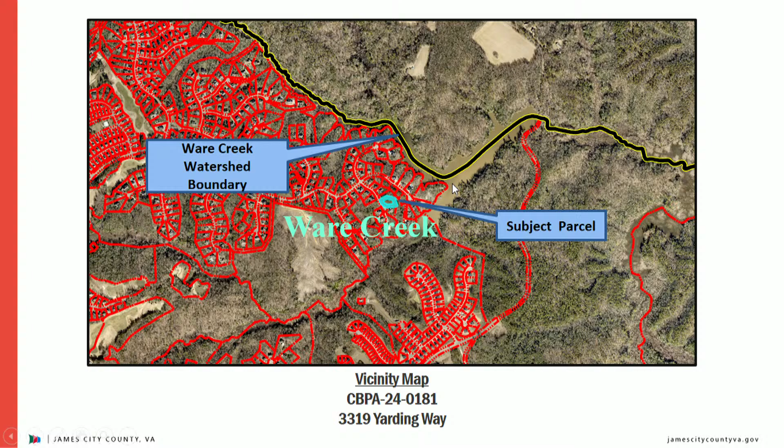You can see the subject parcel outlined here in blue, along with that Ware Creek watershed boundary in yellow with a black line covering it, just indicating the outline of the limits of James City County. The lot size of this property is 0.59 acres, of which 48% is located within the RPA.

The applicants are proposing to construct 2 retaining walls. Total impacts to the RPA associated with this proposal equate to 1,905 square feet of administrative impacts and 228 square feet of legislative impacts, for a total of 2,133 square feet of impacts to the RPA buffer. Total required mitigation for this amount of impervious impacts equals 5 planting units, or 5 canopy trees, 10 understory trees, and 15 shrubs. The applicants have submitted a mitigation plan equaling 5 planting units with an additional understory and shrub, therefore exceeding the county's mitigation requirements.

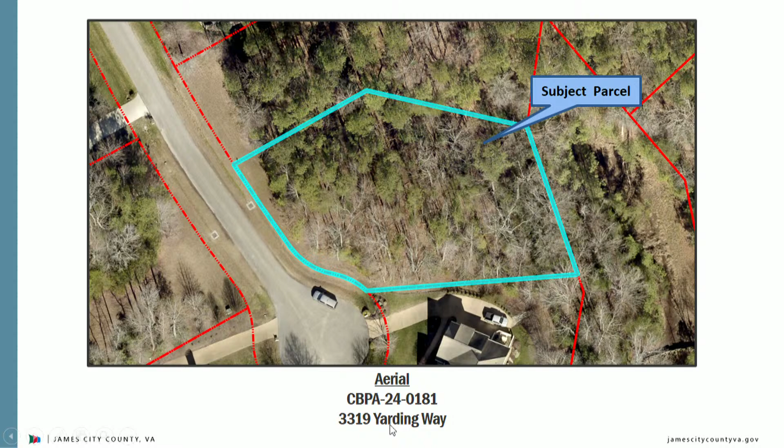Looking at some recent aerial photography, we have the subject parcel outlined in blue here, and I'd like to preface this by saying the orientation of the GIS is different from that of the site plan, so we're going to be rotating it a little bit counterclockwise here. Here's the existing topography, and then the current RPA buffer on the property, and then, orienting ourselves, this is the proposed site plan.

The building setback is outlined in this dark blue here. You can see the limits of the wetlands here in green, along with the proposed mitigation plantings. And then you have the landward 50 RPA buffer here, along with the seaward 50. The portions of the retaining wall that are in the landward 50 are in purple here, with the portions that impact the seaward 50 buffer in orange.

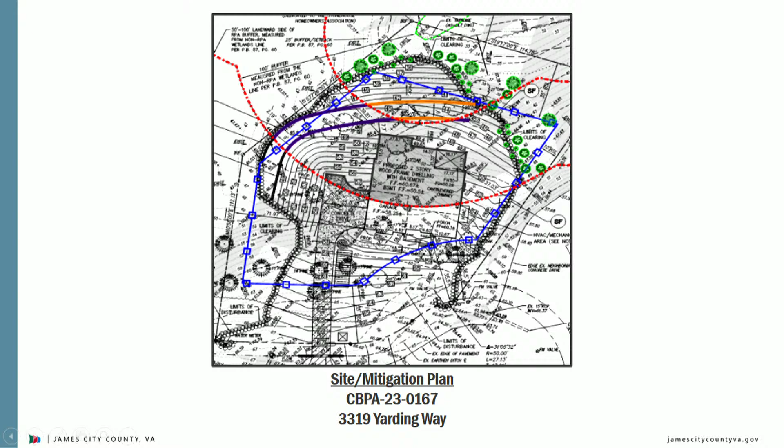Moving in a bit closer to give you a better look, this little buffer here is just showing the proposed limits of disturbance. And then the proposed single-family home here, it's grayed out. That is under administrative approval by staff.

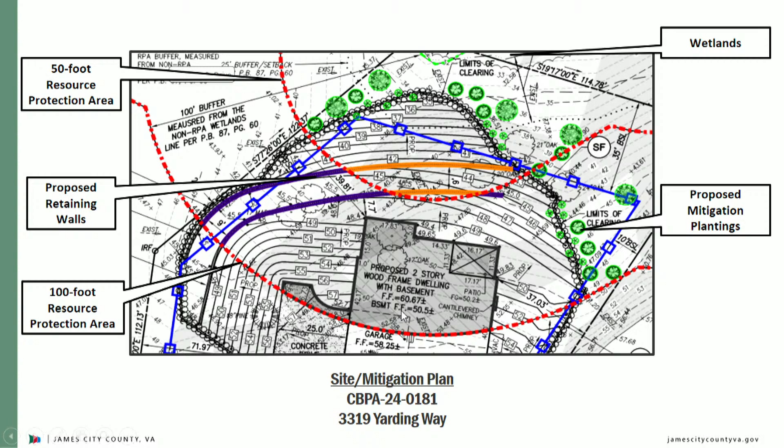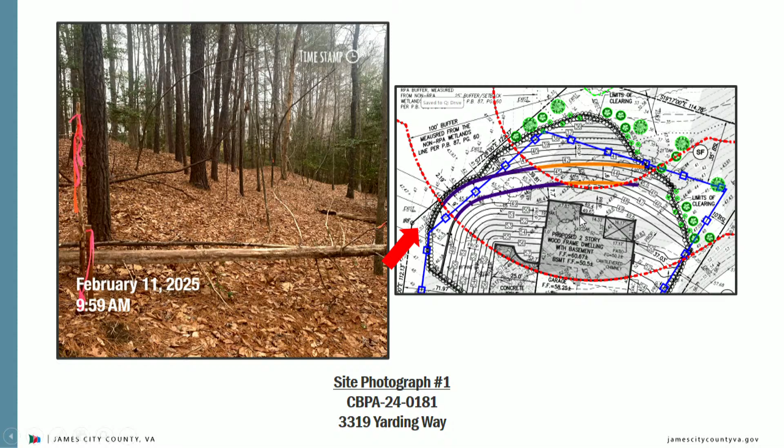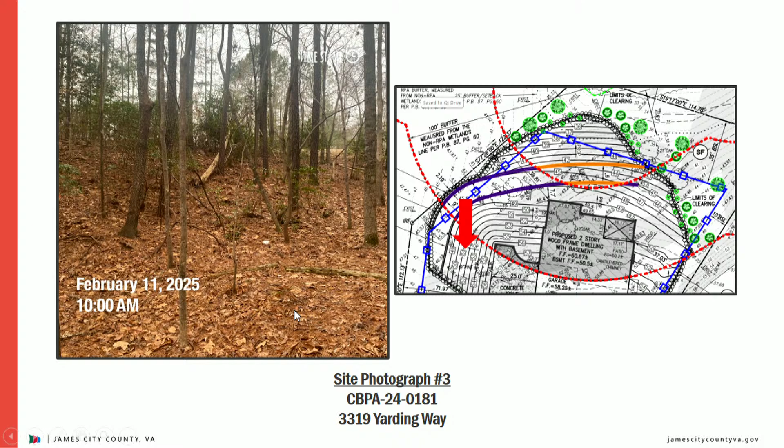Some current site photos, going off this corner of the property line, where those retaining walls start here. We're going to go right, so it's going to extend from about here, all the way out to here. And then just to look back up towards the front of the lot to give you an idea of the topography, since there are a couple steep slopes.

Staff has evaluated the application and exception request for the construction of 2 retaining walls. This application meets the ordinance conditions in sections 23-11 and 23-14 and should be heard by the board because the construction of 2 retaining walls is considered accessory in nature.

The board may grant exceptions to section 23-7 if the application meets the following 5 conditions outlined in front of you. Staff has reviewed the application and exception request and has determined the impacts associated with the proposal to be minor for the proposed development.

Staff recommends approval for this exception request, and if the board wishes to approve this request, staff recommends the following conditions be incorporated into the approval.

The applicants must obtain all other necessary federal, state, and local permits as required for the project. The applicants must submit a surety of $3,750, in a form acceptable to the James City County Attorney's Office, to guarantee the mitigation plan equaling 5 canopy trees, 11 understory trees, and 16 shrubs.

The applicants must record an affidavit in the Williamsburg-James City County Courthouse prior to the issuance of the building permit. A 6-foot chain link fence must be installed along the limits of disturbance that run along the wetland system prior to the start of construction.

This exception request approval will become null and void if construction is not begun by February 12th, 2026, and written requests for an extension to an exception must be submitted to the SRP division no later than January 1st, 2026, which is 6 weeks prior to the expiration date. If you have any questions, I'd be happy to take them at this time.

Questions for Emily? Would you be kind enough to show the site plan one more time, just to orient us? And back one more, to orient us to the building setbacks and so forth.

It looks like they've moved that right corner of the house as far forward as they can.

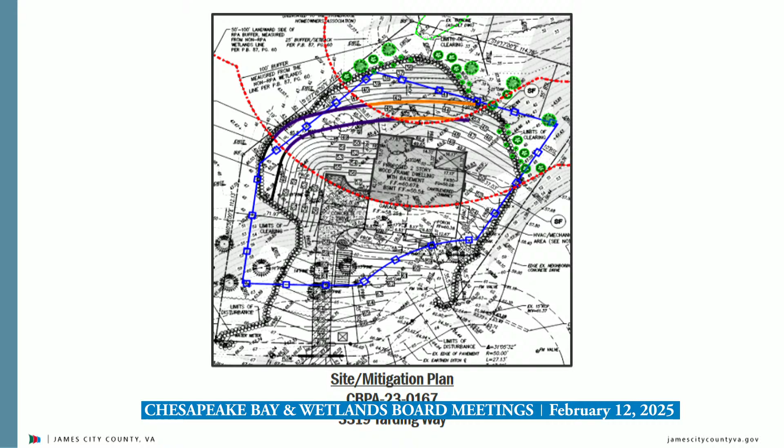Is there any erosion on the property now? I didn't see any, but based on the existing topography, you can faintly make it out on the site plan here with it up on the screen. That little grayed out bit here and there just shows steep slopes. Kind of going back to some of the site photos, you can see how steep it gets, and moving down and then looking back up, it's very hilly, so to speak. But I did not note any erosion when I was out there.

Thank you very much. Any other questions? With that, I will open the public hearing. Would anybody care to address the board on this matter? No takers.

Looks like the matter is before us for discussion. I'll leave the public hearing open in the event somebody wishes to speak.

Thoughts or comments? There's no existing erosion, so I assume the retaining walls are there to serve some other purpose, like maybe making better utilization of the property.

Constructed properly, it should create... You know, I do know that this is hilly terrain, and we've seen these projects in other areas of the county where after construction, they end up with sheet erosion because of the increased impervious surface. I kind of view these as preventative in nature, as opposed to addressing an existing erosion problem.

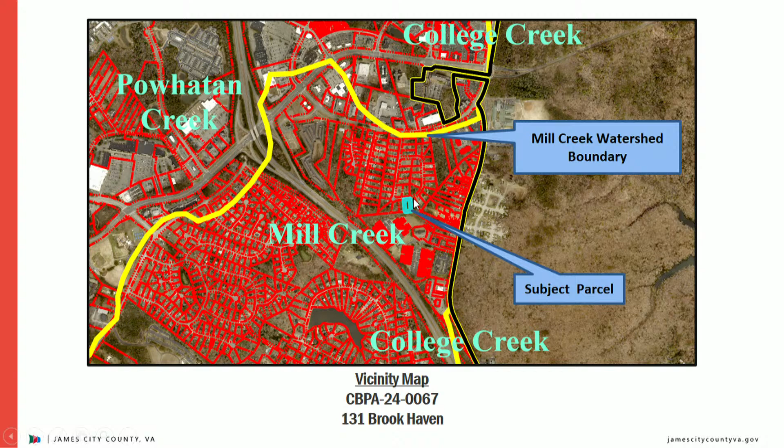You can see the subject parcel outlined in blue here, and then again we have the Mill Creek watershed boundary outlined in yellow here. The parcel was platted in 1972 prior to the adoption of the Chesapeake Bay Preservation Ordinance in 1990. Therefore, the impacts to the landward 50-foot RPA buffer are considered administratively and outside the jurisdiction of the Chesapeake Bay Board. The total lot size of this property is 0.46 acres, of which 98% is located within the RPA. The applicant is proposing to construct a single-family dwelling with an attached deck.

Total impacts to the RPA associated with this proposal equate to 1,409 square feet of administrative impacts to the landward 50-foot RPA and 1,753 square feet of legislative impacts to the seaward 50-foot RPA, for a total of 3,162 square feet of impacts to the RPA overall.

Total required mitigation for this amount of impervious impacts equals 8 planting units, or 8 canopy trees, 16 understory trees, and 24 shrubs. The applicant has submitted a mitigation plan equaling 8 canopy trees, 16 understory trees, and 33 shrubs. This exceeds the county's mitigation requirements.

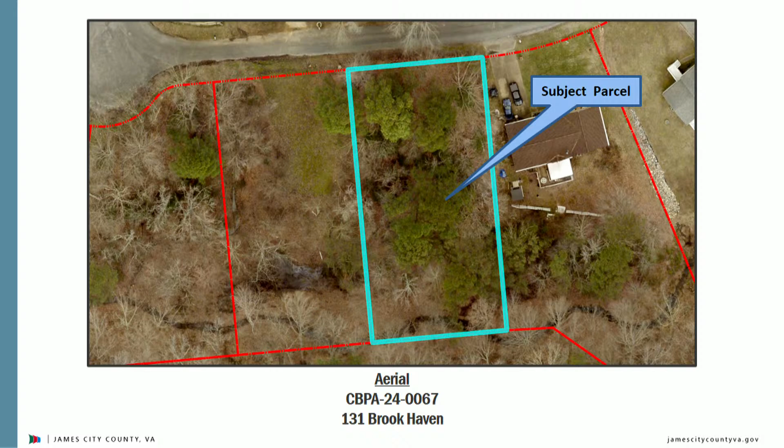So here we have aerial photography, and again, orientation with GIS versus the site plan is a little different, so we're going to have to turn this 180. This is the front of the lot here, along with the existing topography per GIS and the resource protection area. As you can see, the majority of the lot, with the exception of this little bit here, is within the RPA.

And then here we have the proposed site plan. The grayed out portion here is the administrative impacts to the landward 50, with the legislatively approved impacts to the seaward 50 in orange. We have the limits of the wetlands here. As you can see, the limits of disturbance run alongside here, so a condition of approval will be a 6-foot chain link fence. We have the buffers here along with the front building setback.

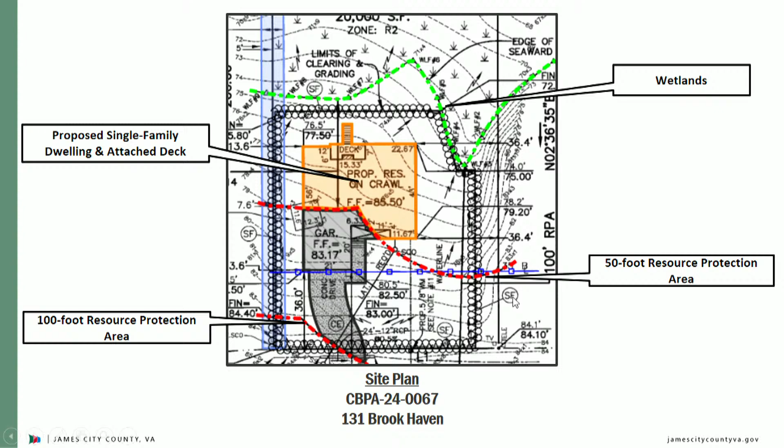And then same thing as before, but with the proposed mitigation. As you can see, all the replantings are to occur within that RPA buffer.

Some recent site photos. If you look here on the site plan, there's an existing structure. That would be this to your left here. So a good way to gauge where we're at in terms of that seaward 50-foot RPA buffer beginning. So right about here is where that proposed single-family home and deck will be going in.

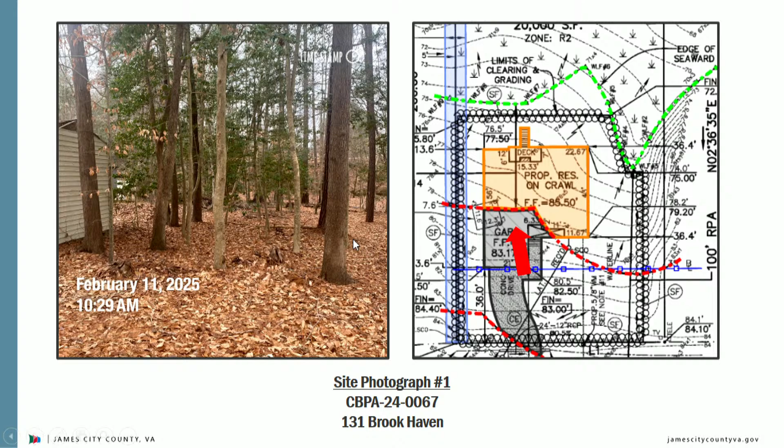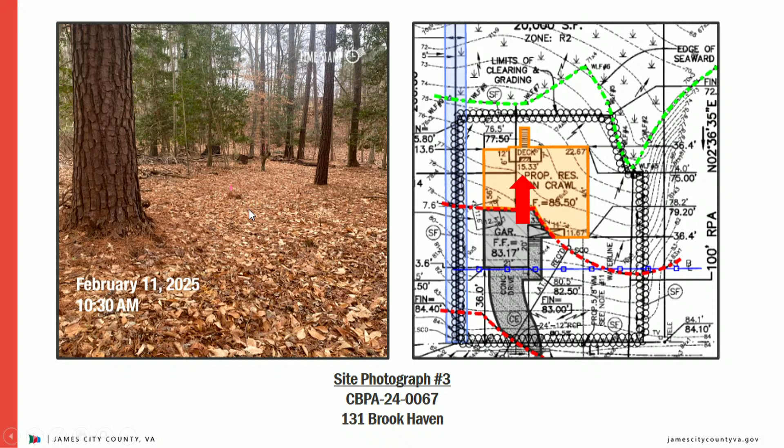Moving forward a bit to see it better in this area here, and the limits of disturbance. Then just going a little bit closer to show the extent of where that deck and single-family home will be placed. And then just looking back up towards the front of the lot to show you the topography of the site currently. Slopes to the rear a bit, but nothing too significant.

Staff has evaluated the application and exception request for the construction of a single-family dwelling with an attached deck. This application meets the ordinance conditions in sections 23-11 and 23-14 and should be heard by the board because the construction of a single-family dwelling with an attached deck within the seaward 50-foot RPA cannot be approved administratively. The board may grant exceptions to section 23-7 if the application meets the following 5 conditions outlined before you.

Staff has reviewed the application and exception request and has determined the impacts associated with the proposal to be minimal for the total proposed development. Staff recommends approval for this exception request, and if the board wishes to approve the request, staff recommends the following conditions be incorporated into the approval.

The applicant must obtain all other necessary federal, state, and local permits as required for the project. The applicant must submit a surety of $5,250 in a form acceptable to the James City County Attorney's Office to guarantee the mitigation plan equaling 8 canopy trees, 16 understory trees, and 33 shrubs.

The applicant must record an affidavit in the Williamsburg-James City County Courthouse prior to the issuance of the building permit. A 6-foot chain link fence must be installed along the limits of disturbance that run along the wetland system prior to the start of construction.

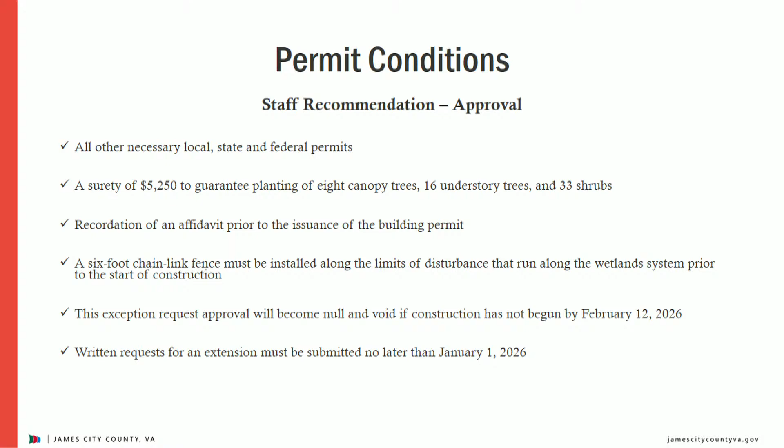This exception request approval will become null and void if construction has not begun by February 12, 2026, and written requests for an extension to an exception must be submitted to the SRP division no later than January 1st, 2026, which is 6 weeks prior to the expiration date. If you have any questions, I'd be happy to take them at this time.

Any questions for Emily? So one question. For, I know we're familiar with like Ford's Colony, we do a lot of these, and the minimum square footage necessary, or the minimum square footage requirement for like a house in that neighborhood - does Brook Haven have a minimum square foot requirement in the neighborhood that you're aware of? Not that I'm aware of, so I will defer that to the applicant.

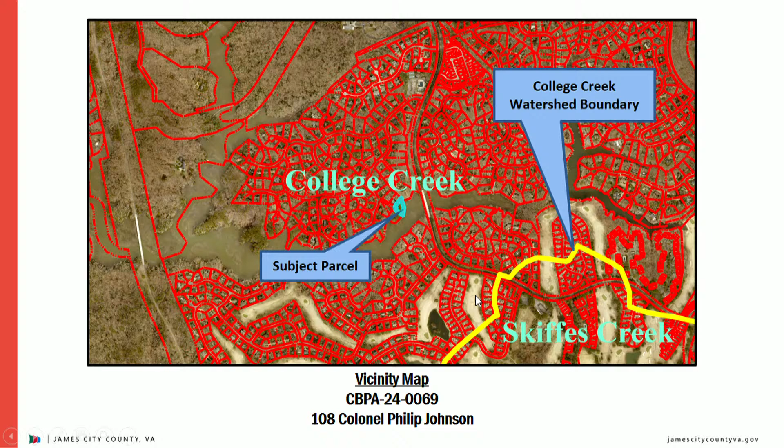You can see here, as usual, subject parcels in blue with the watershed boundary outlined in yellow. The total lot size of this property is 0.55 acres, of which 95% is located within the RPA. The applicants are proposing to construct a single-family dwelling.

Total impacts to the RPA associated with this proposal equate to 3,307 square feet of administrative impacts to the landward 50-foot RPA, 728 square feet of legislative impacts to the seaward 50-foot RPA, for a total of 4,035 square feet of impacts to the RPA. The parcel was platted in 1978 prior to the adoption of the Ches Bay Preservation Ordinance in 1990. Therefore, the impacts to the landward 50-foot RPA buffer are considered administrative and outside the jurisdiction of the Chesapeake Bay Board.

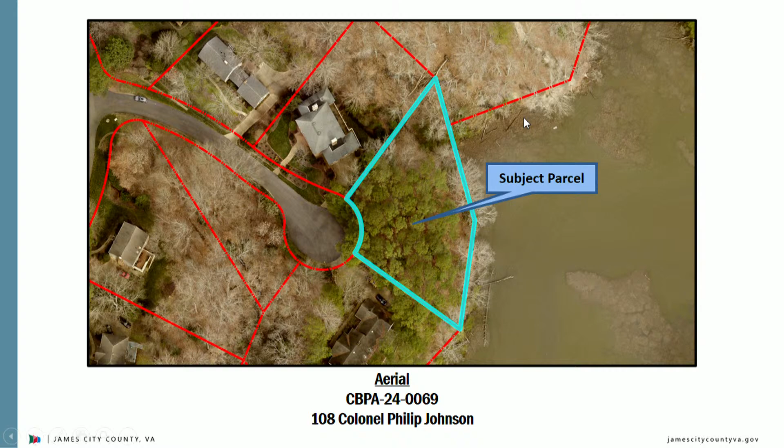We have aerial photography in front of you of the lot, this is the front of the lot, rear of the lot, along with the existing topography and RPA buffer, as well as the FEMA floodplain, closer to the water. This is the proposed site plan with the legislative seaward 50 impacts highlighted in orange. As you can see, based on the existing topography, still fairly far from the wetlands due to the slope. We have the limits of disturbance outlined in this black buffer, along with the building setbacks in blue.

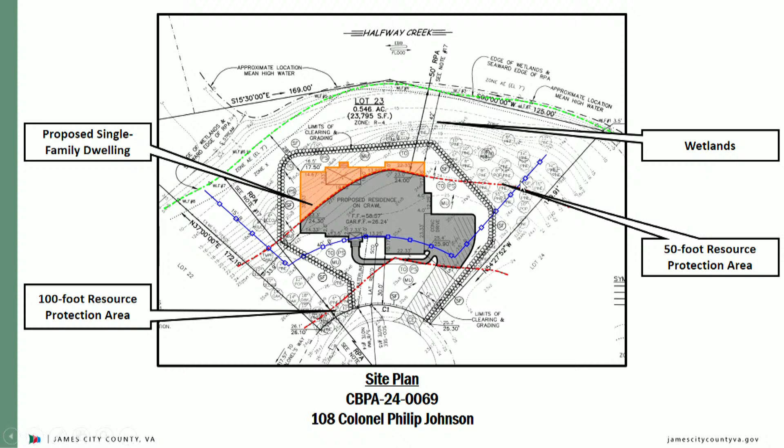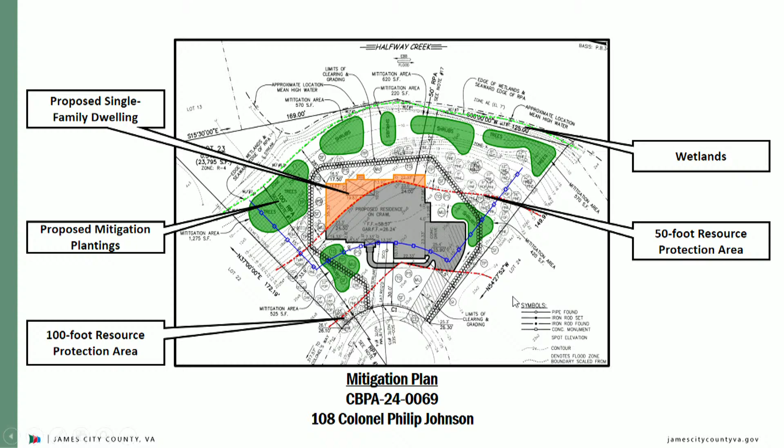Just kind of going off that same plan, but with mitigation proposed. As you can see, it's all proposed to be replanted within that RPA buffer. And then some site photos showing, again, that slope I was referring to with the existing topography.

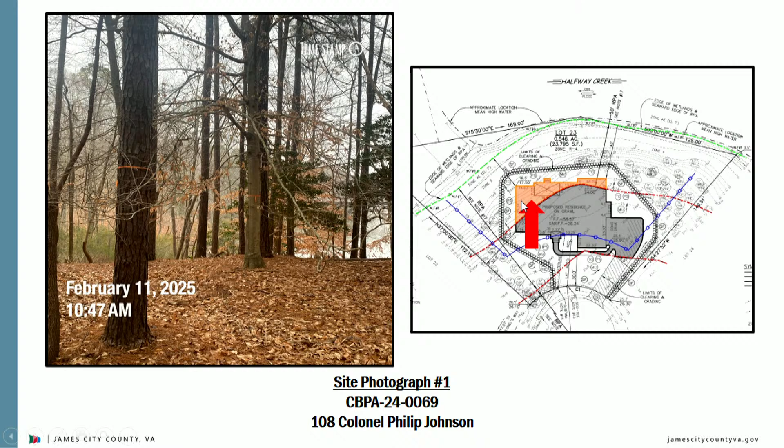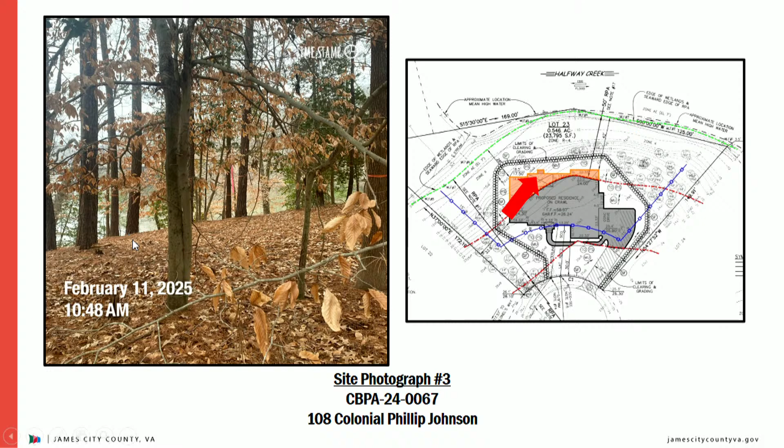On the left side of the lot, kind of where that 50-foot seaward impacts are to begin. And then moving left, again, just showing the existing topography and proposed location on the lot. Moving a little bit further to that slope, you can see where it begins to drop. And then looking back to the left to show the extent of where that proposed dwelling will be. And then looking back up towards the front of the lot, you can see that where it's being proposed is still relatively flat for where it's at on the lot.

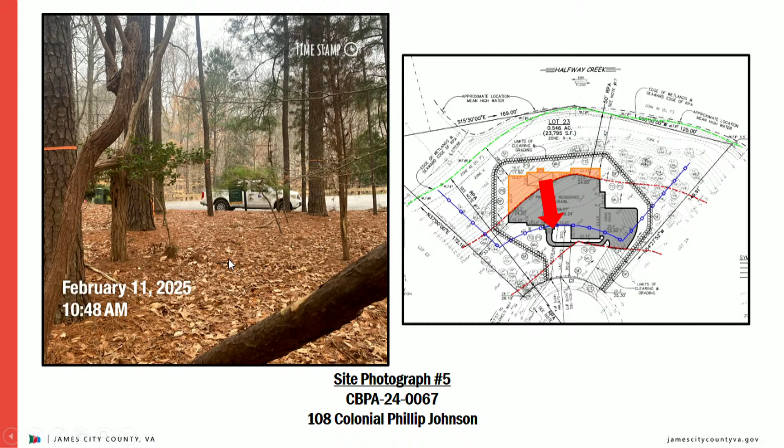Staff has reviewed the application and exception request and has determined the impacts associated with the proposal to be minor for the proposed development. Staff recommends approval for this exception request, and if the board wishes to approve the request, staff recommends the following conditions be incorporated into the approval: the applicant must obtain all other necessary federal, state, and local permits as required for the project. The applicant must submit a surety of $5,500 in a form acceptable to the James City County Attorney's Office to guarantee the mitigation plan, equaling 10 canopy trees, 21 understory trees, and 42 shrubs.

The applicant must provide written approval from the Kingsmill Community Services Association for the dwelling as situated, crossing the building setback line, prior to building permit issuance.

The applicants must record an affidavit in the Williamsburg-James City County Courthouse prior to the issuance of the building permit.

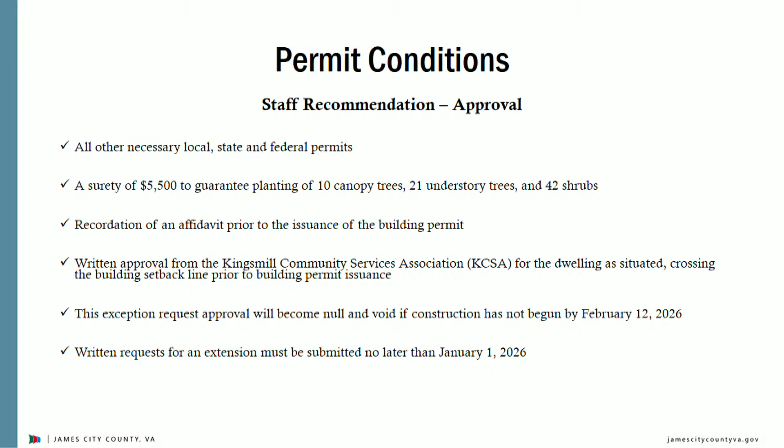This exception request approval will become null and void if construction is not begun by February 12th, 2026. A written request for an extension must be made to the SRP division no later than January 1st, 2026, which is six weeks prior to the expiration date.

If you have any questions, I'd be happy to take them at this time. Questions for Emily? I had one question, but she answered it in her permit conditions with the building setback. Thank you, Emily. Welcome.

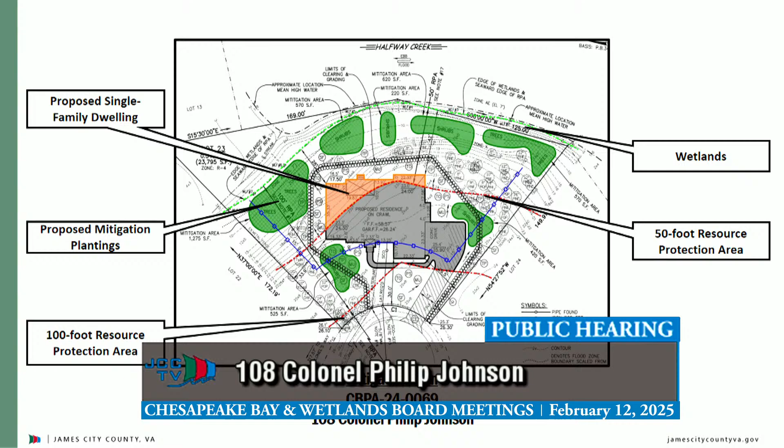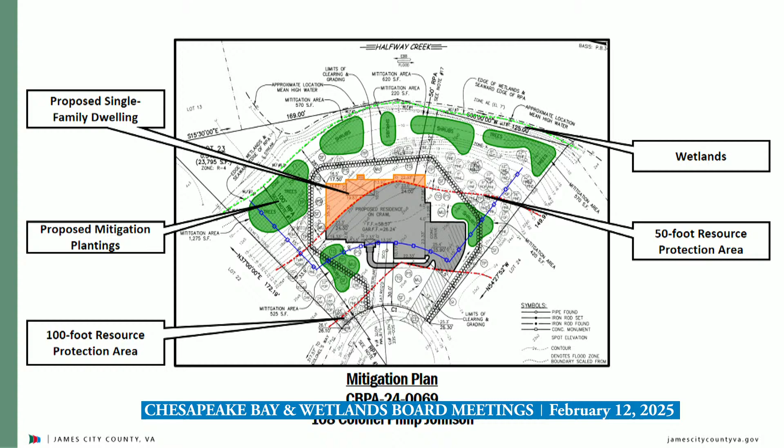Emily, I have a question. I feel like I know the answer, but could you go back to the site plan? I noticed the finished floor for the building — the number seems to be a mistake. I don't think it's going to be 30 feet off the ground, but the finished floor was listed as 58, 57, with the ground around it being 25. Just guessing, wanted to clarify that's not the case.

So I'm going to defer that to the applicant. Yeah, okay. Any other questions for Emily?

Thank you, Emily. With that, we'll open the public hearing. Would anybody care to address the board on this matter? This is a strange evening.

With that, I'll pull it back to the board for discussion. Error again — the 26 feet versus something? Finished floor of the garage versus the first floor. Yeah, the first floor of the house is listed at 58, 57. I'm guessing it's supposed to be 28, 57. That would make it a lot of crawl space. Yeah, a lot of crawl space, exactly.

To me, pushing the building forward into the setback that they're needing a waiver from, it looks like it places the house on a flatter area, which would help reduce erosion into the RPA buffer and limits.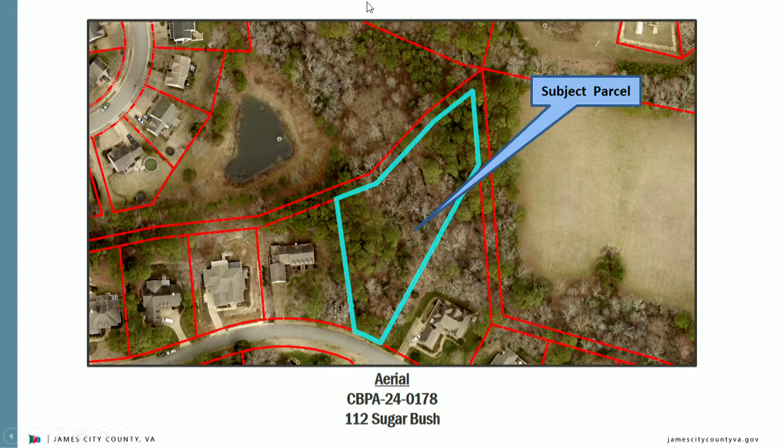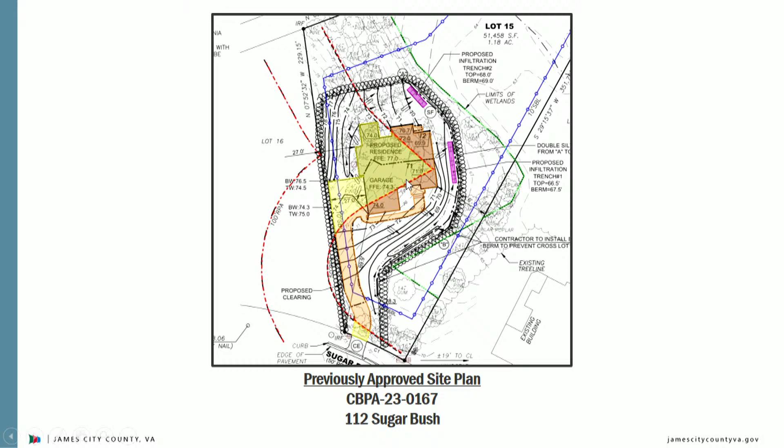So we have the current aerial image of the lot, along with topography, resource protection area, and this was the previously approved site plan for the construction of the actual single-family residence.

As you can see, that one BMP that was proposed has been moved here, which is before the board again this evening.

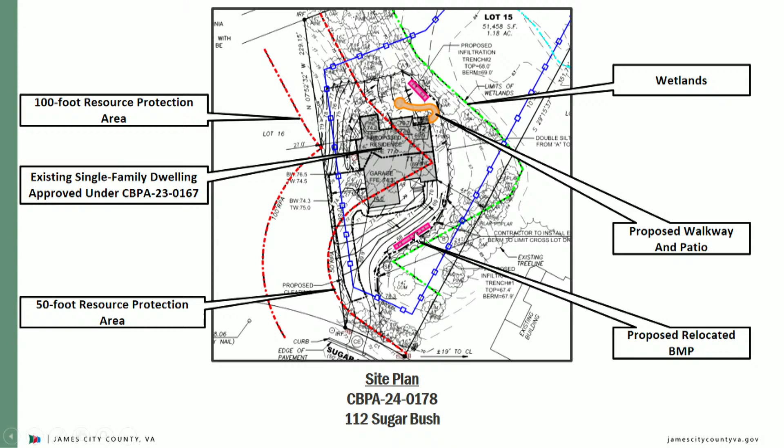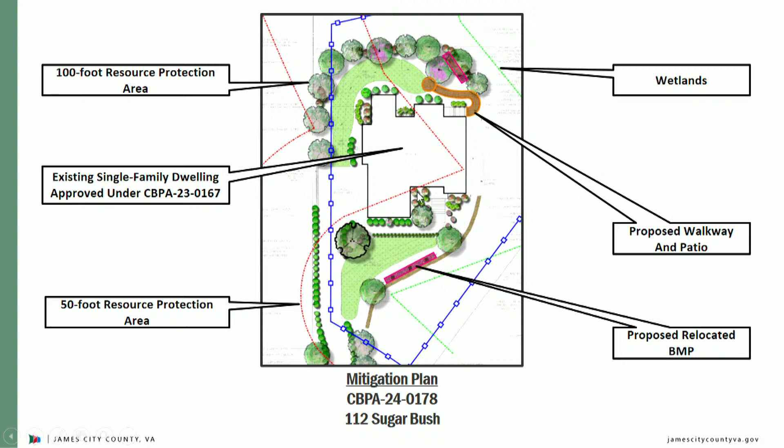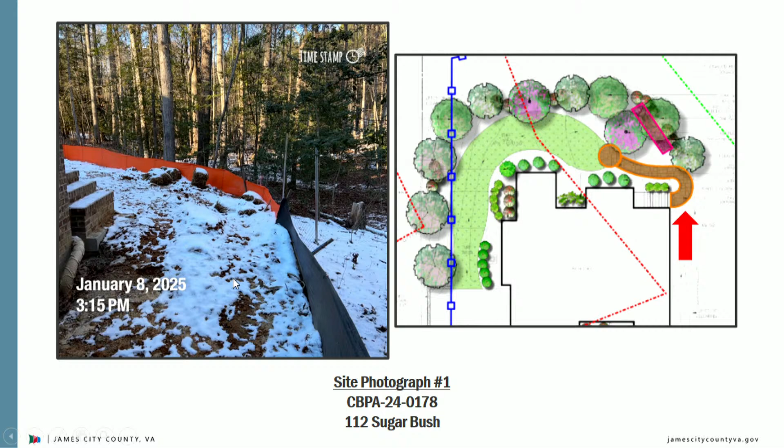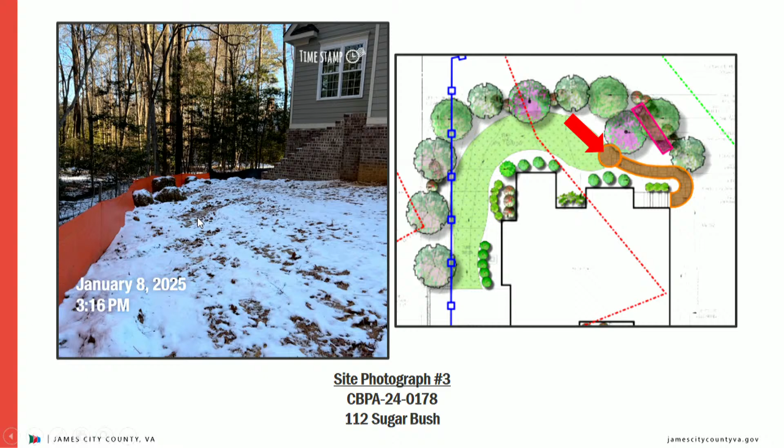And then same site photos that were presented to you last month. This walkway is going to come off the staircase here and kind of go around to the left here. If we move to the other side of it, again, wrapping from the staircase out this way, coming out again here and ending right about here.

Staff has evaluated the application and exception request for the installation of a patio and walkway. This application meets the ordinance conditions in sections 23-11 and 23-14 and should be heard by the board because the construction of a patio and walkway are considered accessory in nature.

The board may grant exceptions to section 23-7 if the application meets the following 5 conditions outlined before you. Staff has reviewed the application and exception request and has determined the impacts associated with the proposal to be minor for the proposed development. Staff recommends approval for this exception request, and if the board wishes to approve the request, staff recommends the following conditions be incorporated into the approval.

Applicants must obtain all other necessary federal, state, and local permits as required for the project. Applicants must submit a surety of $500 in a form acceptable to the James City County Attorney's Office to guarantee the mitigation planting of 1/2 unit or 6 shrubs.

An affidavit must be recorded in the Williamsburg-James City County Courthouse prior to the release of surety. The applicants must submit a letter of installation from a qualified professional to the Stormwater and Resource Protection Division prior to the issuance of a final certificate of occupancy.

This letter must verify compliance with all approved construction plans for stormwater BMP facilities, and no surveyed as-built drawings are required. The exception request approval will become null and void if construction is not begun by February 12th, 2026.

Written requests for an extension to an exception must be submitted to the SRP Division no later than January 1st, 2026, or 6 weeks prior to the expiration date. If you have any questions, I'd be happy to take them at this time.

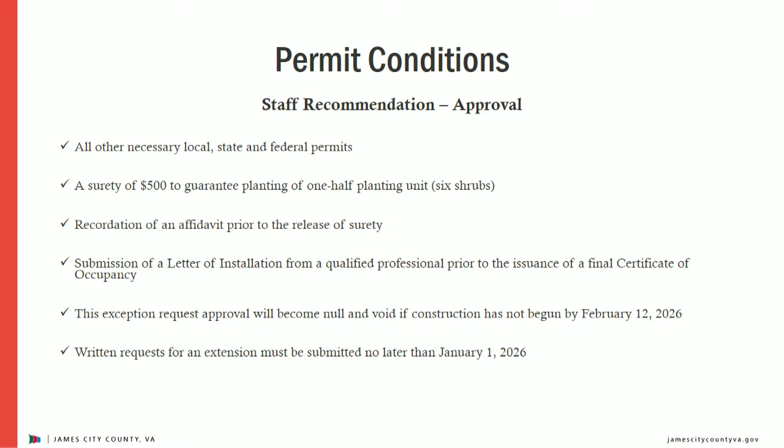Questions for Emily?

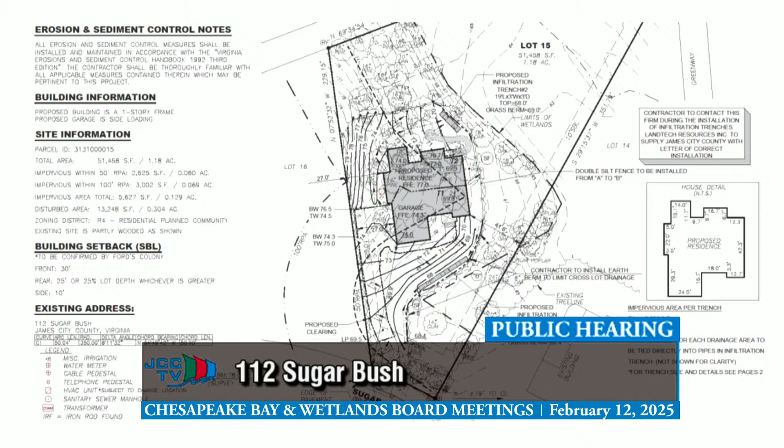This shifted the previously proposed low point next to the house to the now proposed location. To ensure our revisions were acceptable to the neighbor, I had a site meeting with the owner of Lot 12, Mr. Detweiler, last Friday, as well as a meeting with Mr. Detweiler and Ford's Colony staff yesterday afternoon.

We discussed how the water was going to leave our site and flow through the natural draw that has existed between the two properties prior to the Ford's Colony development. In addition, we discussed how over 100 acres of land drains through the rear of his lot and that our options were very limited.

After the Friday meeting, I made a couple other minor changes to our development plan and coordinated with Williams Landscaping to update our plan to include dimensions and inspection requirements for the installed trenches. Aaron Williams, the owner of Williams Landscape and Design, is here with me tonight and is aware of the neighbors' concerns as well as the installation requirements to make sure all parties are satisfied post-construction.

As of 2 p.m. today, staff received an email from Mr. Detweiler stating no comment in response to our final plans. He goes on to say his subject issue comments submitted at the January 9th, 2025 Chesapeake Bay Board regarding the infiltration trench discrepancies between the landscape plan and plot plan have been discussed and resolved in these respective updated plans. Emily has that email to read for you as well after my comments.

This plan is pretty much the same as what Emily presented to you. You'll see that this trench was reflected. It was kind of graphically drawn incorrectly before. It was closer to 31 feet when it's going to be 41 feet long.